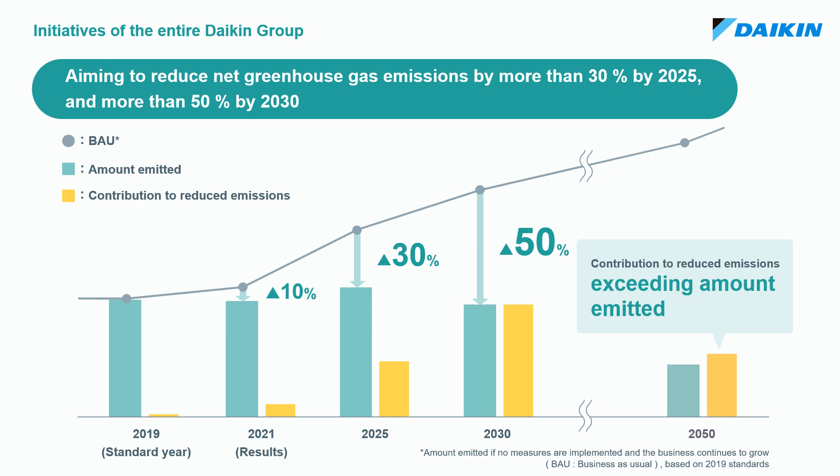Based on 2019 standards, the Daikin Group aims to reduce net greenhouse gas emissions by more than 50% by 2030, compared to what would be emitted if no measures are implemented. In addition to reducing emissions during production, we will reduce greenhouse gas emissions throughout entire product life cycles. Here, we will introduce our main initiatives aimed at reducing net greenhouse gas emissions.

First is reducing power consumption during product use. We will lead the industry with environmentally friendly products by aiming to deploy inverters in 93% of our household air conditioners by 2025. We will also strive to develop and expand sales of energy-saving products for systems.

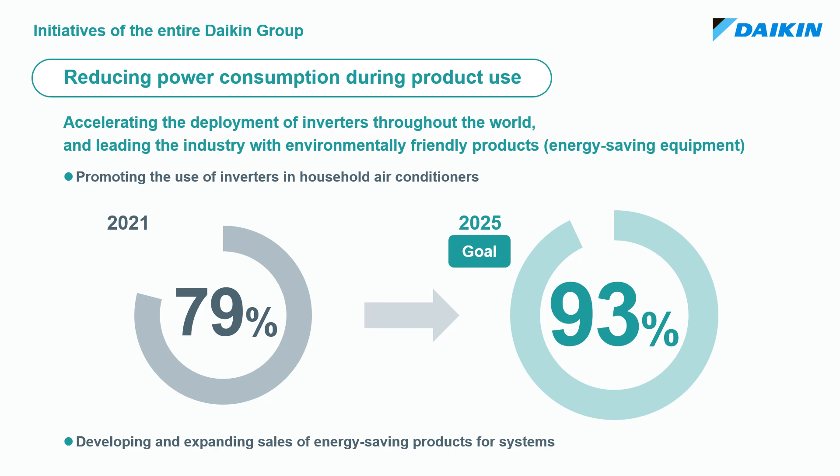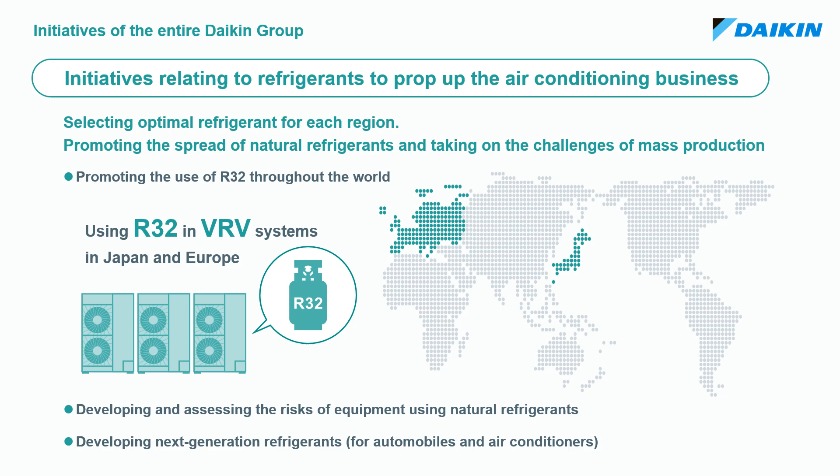Refrigerants are indispensable for air conditioning, and we are promoting the use of R32 in various regions. Moreover, we are promoting the use of natural refrigerants and the development of next-generation refrigerants.

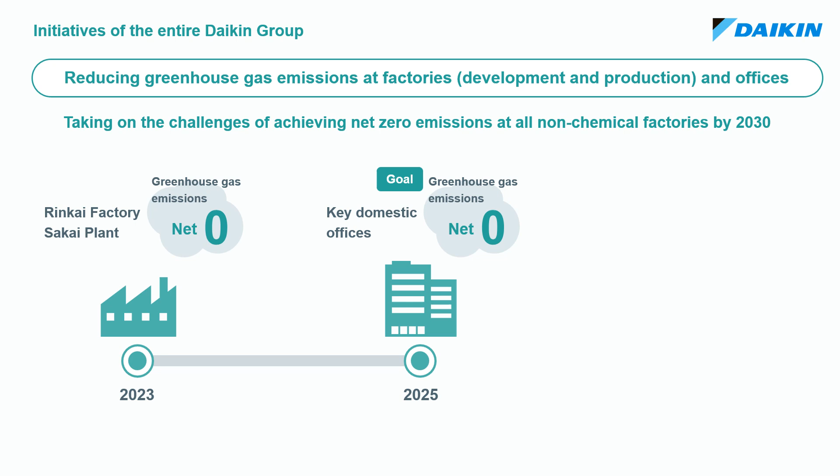We are also making progress in reducing greenhouse gas emissions at factories and offices. In FY 2023, we achieved net zero emissions at Rinkai Factory of Sakai plant. Moving forward, we will aim to achieve net zero emissions at all our key domestic offices by 2025, as well as all global bases by 2030.

In looking toward a future carbon-neutral society, we will also take on the challenges of expanding sales of micro-hydropower products, exploring power-related businesses, and acquiring negative emission technologies.

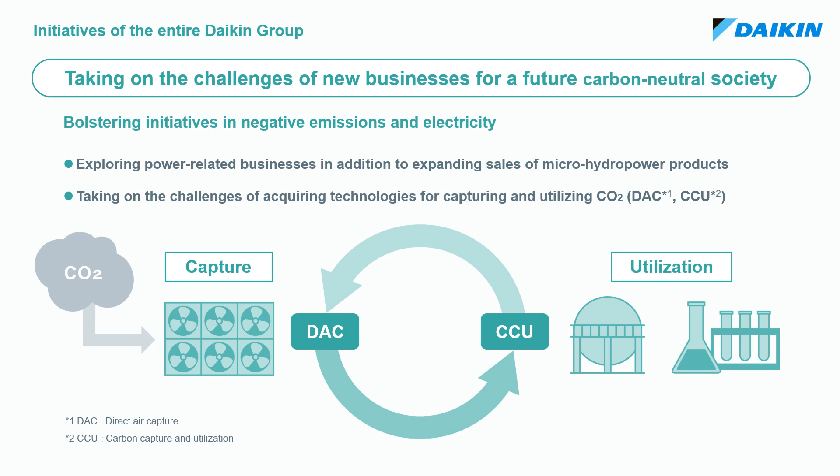Next, we will take a look at the initiatives of the Oil Hydraulics Division. The technological power of the Daikin Group has been brought together at Plant No. 1 of the Oil Hydraulics Division at Yodogawa plant to simultaneously achieve energy savings and comfort. First is the use of heat-shielding paint made from fluororesin. Coating the roof with Daikin's highly weather-resistant paint achieves an indoor temperature reduction of 5 degrees Celsius compared to conventional paint.

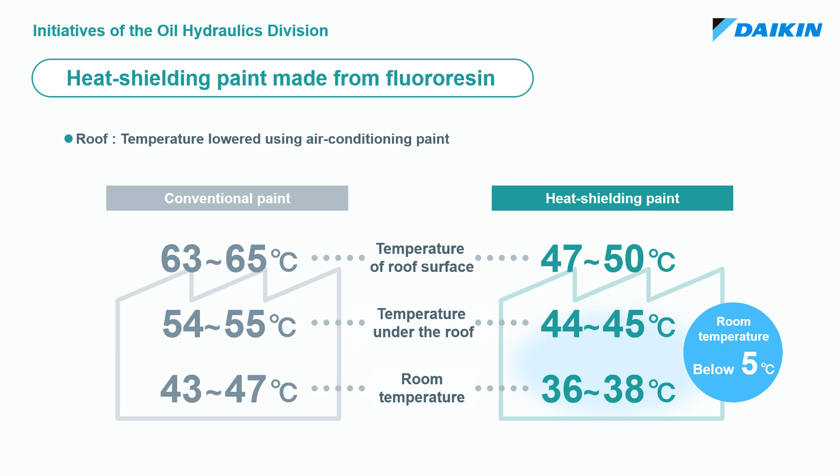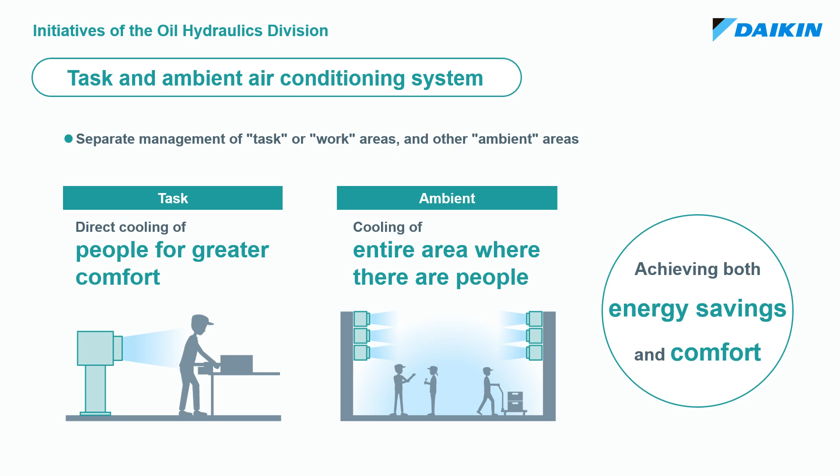Next is the deployment of our task and ambient air conditioning system. Both energy savings and comfort were achieved by integrating the task method of blowing air directly onto the worker and the ambient method of cooling the entire area.

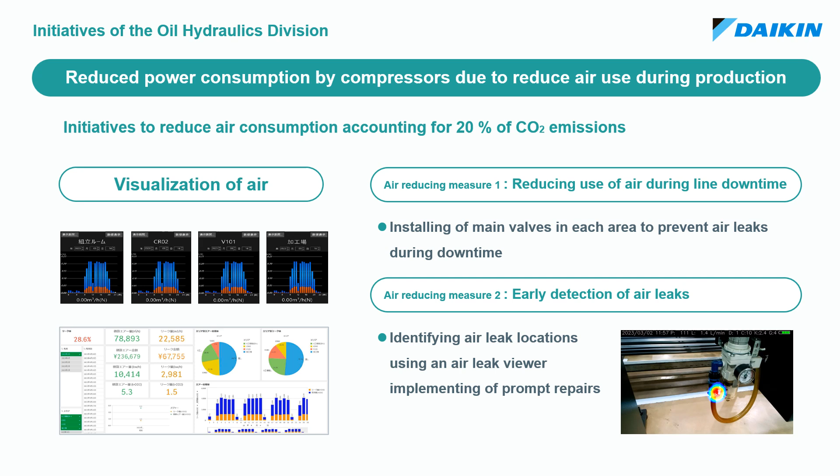Air was visualized during production, reducing the use of air during production line downtime, and early detection of air leaks reduced power consumption by compressors by more than 10% in FY 2023. Moving forward, measures will be implemented to improve equipment based on visualization of data to further accelerate reductions in power consumption.

We have also made a switch from oil-based to water-based cutting oil, contributing to reduced waste oil and CO2 emissions during waste oil treatment. Moreover, we have succeeded in reducing oil mist inside factories.

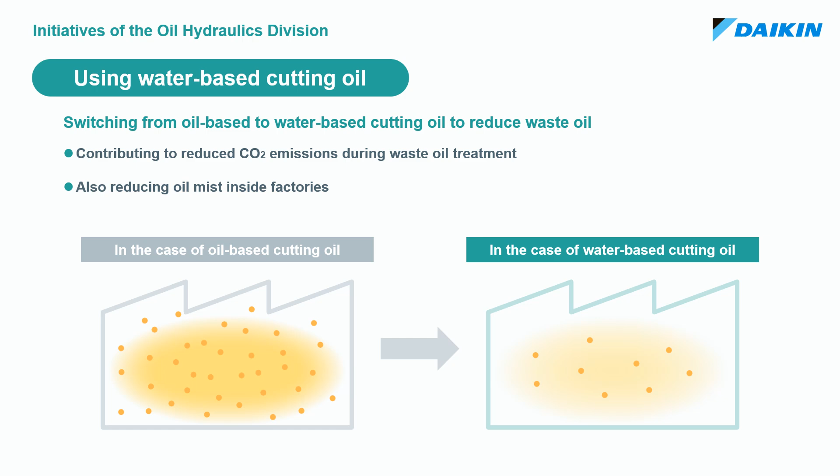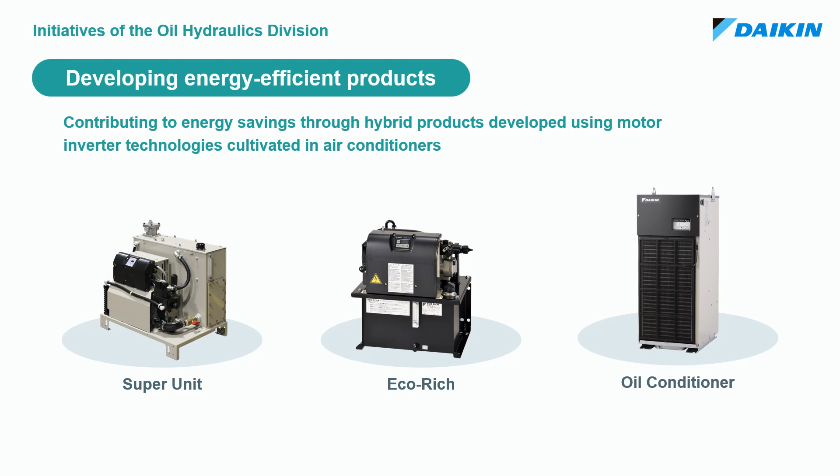In developing products, we have expanded our lineup of hybrid products equipped with Daikin's core motor inverter technology. Installing them in our customers' production facilities has contributed to energy savings. Customers who have deployed our super units for presses have reduced their power consumption by around 72%, realizing reduced CO2 emissions and an annual cost cut of around 500,000 yen due to energy savings.

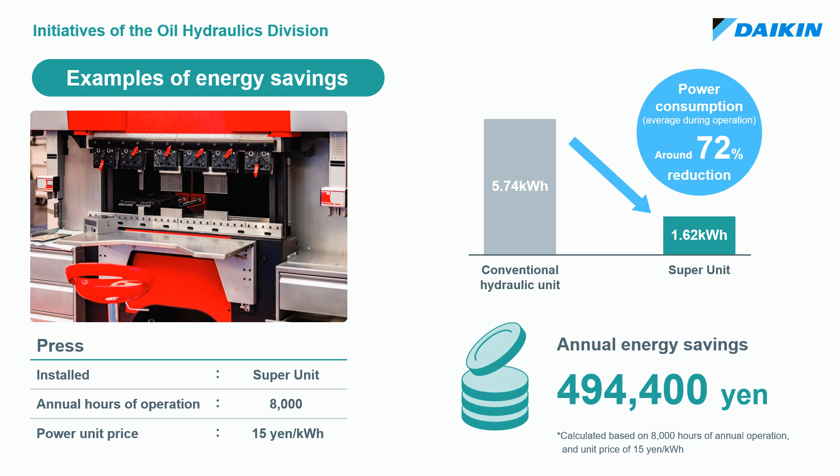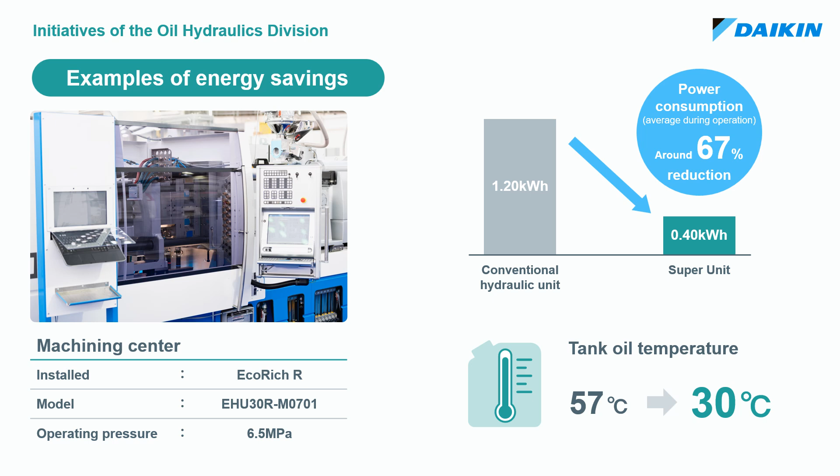Power consumption was reduced by around 67% at a machining center where our EcoRich R was deployed, and the tank oil temperature was lowered from 57 degrees Celsius to 30 degrees Celsius. Daikin Industries' Oil Hydraulics Division will realize energy savings and comfort at factories, while contributing to a carbon-neutral society.